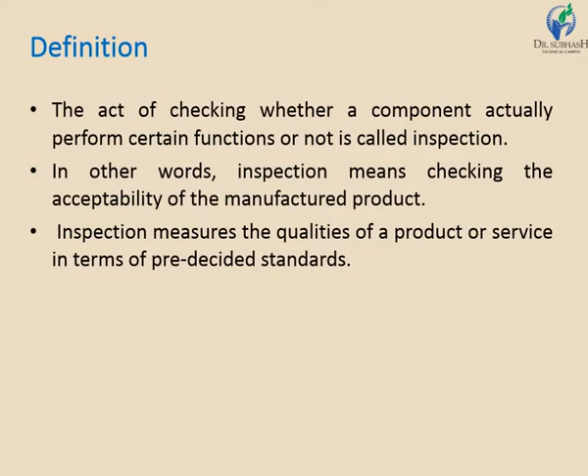It measures the quality of products or services in terms of pre-decided standards. Whether the standards that have been set have been attained or not, inspection will help you to measure the qualities of the product. Product quality may be specified in terms of surface finish. Suppose we require a 0.2 micron surface finish; inspection checks whether that surface finish is attained or not.

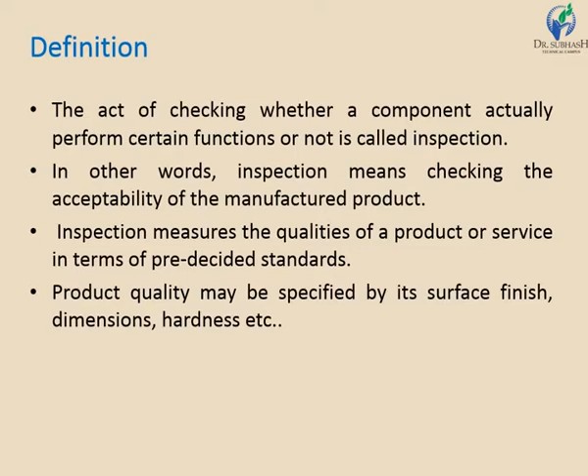In terms of dimensions, we want a dimension of 20 mm, so is the manufactured product within that dimension or not. In terms of hardness, we require this much hardness; is the hardness according to the specified standard or not. So it checks the qualities, the pre-decided standards, and whether the component performs its decided functions smoothly or not. So inspection is simple: it checks certain standards, it checks the quality.

Next is purposes of inspection. Why inspection, or what is the main purpose of inspection? It will help you to separate or distinguish the defective parts from the non-defective parts, and it will also ensure that the quality of the product is maintained. It gives you surety that the product quality which has been set is attained or not.

It locates the defects in raw materials and flaws in the process which otherwise cause problems at the final stages. Once the product is finalized, if no inspection is done, there are chances that the manufactured item will be rejected. So by doing inspection, you can locate the defects, errors, flaws in the processes, or any imperfection going on within the process. So it locates defects in raw materials and flaws in the process.

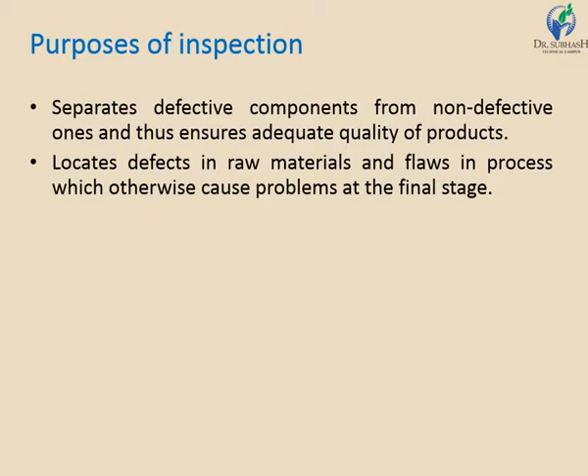Flaws in the process means any imperfection that is going on; that can be located and separated. Next, it prevents further work being done on semi-finished products. At an intermediate stage, if you check the product at the semi-finished stage and find it is not as per the standards, there are some faults, it will help you remove that product and not work further on that spoiled product. So it saves time.

It detects the source of weakness and trouble in the finished product and thus checks the work of the designers. It will help to identify where the errors are, where the weakness is in the product that is manufactured. It will try to identify that and also checks the work of the designer. So it will try to find out the main point of trouble where it was caused, and it will help you

to nullify that. Then it builds up a reputation of concern, as it helps in reducing the number of complaints from the customers. So by doing the inspection, you can get good results in terms of less number of complaints, because if you are not inspecting the parts that are manufactured, then there are chances that the product will have more complaints. But if the item or component that is manufactured has gone through the inspections at various stages, then you can easily identify the errors or the weakness, you can easily locate the

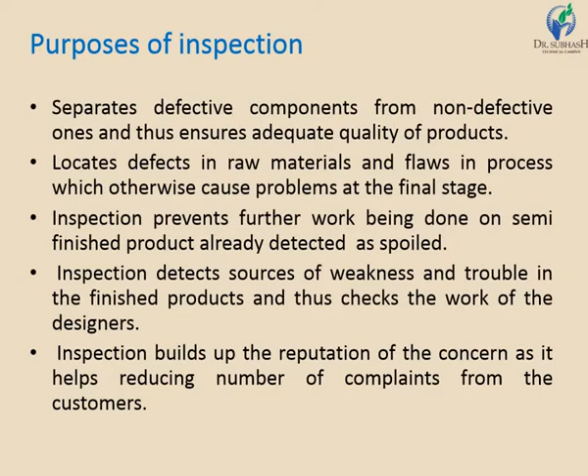defects, and that will ultimately help you to produce products that are errorless. So the complaints that are coming will be less if the inspection has been done. So it sets a reputation of concern. We always believe in good quality products, so that will help you to develop a reputation within the industry or within the market. This is all about the purposes of inspection.

Next is types of inspection. First is floor inspection. Here the inspector walks around on the shop floor from machine to machine. The inspector, who is responsible for inspecting or checking the samples, is walking on the shop floor, and he will go from one machine to another machine and check the samples that have been produced or worked by the machine operators.

It helps catching errors during the process itself before the final production is ready. So here the inspector moves or walks on the shop floor from machine to machine where the samples are being produced by the operators, and helps them to reduce the errors by catching the errors during the process itself before it is ready for the final production. So that is all about floor inspection.

Then fixed inspection. Here the work is brought at intervals for the inspectors to check. Fixed inspection means, suppose there are 5 stages for the job to be completed, then there are certain intervals at which the inspectors are located to inspect the samples or the job. It discovers defects after the job has been completed. So here after certain intervals, the inspection is done by the inspectors.

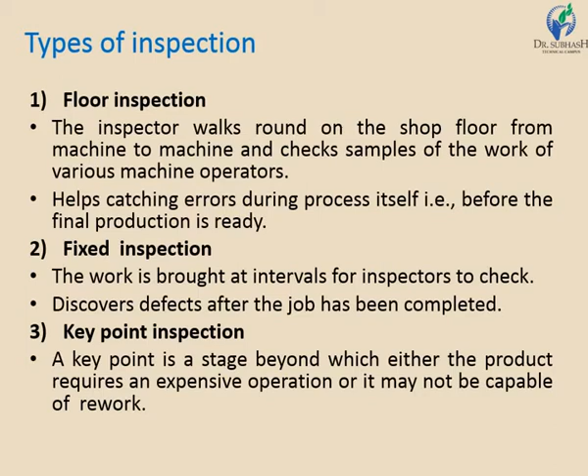Third is key point inspection. There is always a key point in any product, beyond which either the product requires an expensive operation or it may not be capable of rework. So at that key point, there is always an inspection to be done, because beyond it a very important step has to be decided, what to do at that very important stage. So at that point there is an inspection to be done.

Next, inspection of incoming materials or received materials. Here the raw materials are inspected, the materials which you are buying from other vendors, to eliminate those materials which do not meet specification and are likely to cause trouble during the processes. So whenever you are purchasing raw materials from other vendors, there is always an inspection to be done of these materials, whether the material that has arrived at your industry is as per the specifications that you have ordered or not, so that it will cause less trouble when you are doing the production.

Then evaluate vendor's quality and ability to supply acceptable materials. When you are purchasing from the vendors, you evaluate whether the quality they deliver is as per the qualities that you have mentioned or not. So evaluating the vendor's quality and ability to supply acceptable materials: whether the materials are acceptable or not, whether they are as per some standards or not, all of that is checked or evaluated for the vendors.

Then inspection of raw materials may involve visual check up only, a dimensional check, a test of physical properties, etc. So raw materials can be checked visually, and their dimensions can also be checked. Then for the test of physical properties, different machines can be used to check the properties of the material.

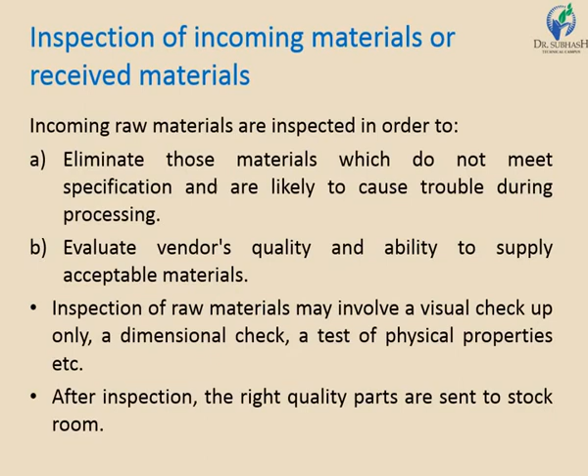Next is in-process inspection. The first products that go out of line are inspected for conformity. In-process inspection means during the process, whenever the parts are being made, those that come out of line are inspected for conformity. So as the parts come out from the lines, they are inspected for conformity, whether they are as per the standards, whether they are coming out as per the requirement, whether they meet the standards and specifications that have been set or not. So just for the conformity basis.

Then if issues are raised at this stage, the factory can immediately take actions and avoid delays. So during the in-process stage, there is a feedback or control system which tries to identify the basis of errors or defects, and it will immediately take actions such that delays can be avoided. Then it can be carried out by the workers doing the job.

Then next is it may check the first few parts of a new machine setup. When you are setting up a new machine or new setups are being arranged, it will check whether the few parts manufactured with the help of this new setup are as per the standards or not, whether they are as per the quality or not. Then it is checked before it goes for the next operation.

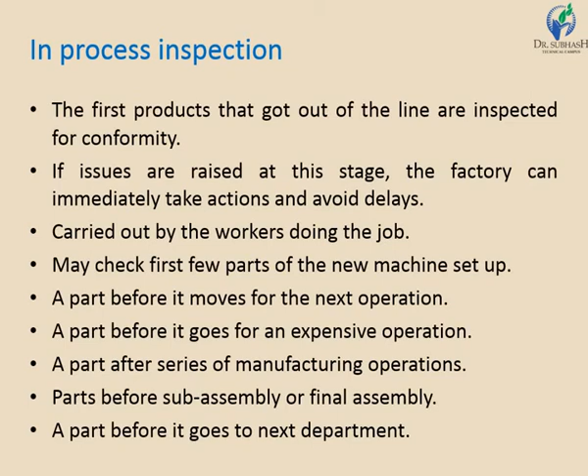Then parts before sub assemblies or final assemblies, because doing the assembly requires collection of all the different components or parts, and finally assembling all those parts to accomplish the one final product. So all those dimensions, all those tolerances are checked, whether they are as per the specified standard or not, so that the assembly can be well fitted. And a part which goes to the next department, before that also inspection is done. So this is all about in-process inspection.

Next is final inspection. It is also known as pre-shipment inspection. So before dispatching or delivery of any component is done, one last time the inspection is done, and that is known as final inspection or pre-shipment inspection. It is the most popular type of inspection for importers. It takes place once all the products are finished and ready for the shipment.

So when all the components or products are finished and ready for the shipment, at that time this inspection is done and the samples are drawn randomly. So if you are delivering 500 components, then after the production of all those 500 components, samples from those 500 parts are drawn randomly and checked whether they are as per the specification, as per the standards or not, and the result of that component will represent the whole batch. So based on that, final inspection is done and that will represent the whole batch of components.

So this is all about inspection types. I hope this presentation has helped you to understand what inspection is and the types of inspection.